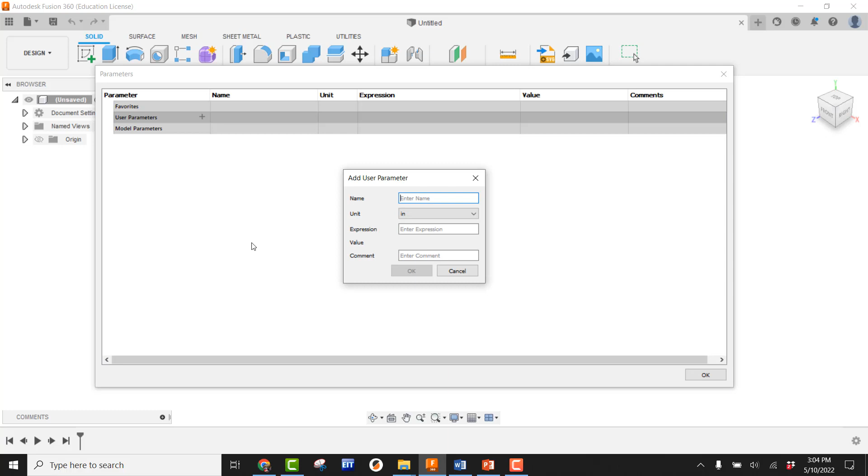All right, so what we have to do first is set up our parameters. What I'm going to be doing is coming here to modify, going down to change parameters, and you're going to see we have 3 different things here. The one thing we're going to be focusing on are the parameters that we are going to be setting up, those are called user parameters. So when I hit the plus sign, you can see how I can start creating these parameters.

So the first thing I'm going to do is type in width. We're going to set up the overall width of this box assembly, and the overall width is 5 inches. So I'm going to type in 5 for my expression, and then a little comment down here, we're just going to say that this is the box width. I'm going to go ahead and say OK. Once we do that, we can now see that all those have been placed in our parameters dialog box.

Let's keep going. Okay, so we have our width, let's go ahead and do our height as well. When we measured our height, we found out that for the assembly it was 4.5, so I could easily type in 4.5. But the thing is, in the end, I want a box that's going to be able to correct and fix itself. So what we can do is, after we have this thing assembled, it's going to have some AI, some artificial intelligence to it with these parameters.

It's going to be able to shrink and expand and move around and thicken and all sorts of stuff. I want to keep this having some proportions to it, so I don't want to put in an exact number here. Instead, what I'm going to do is think about percentages. We measured this in real life, and the height of this box is actually 4.5 inches. So if I bring up my calculator here, if we took 4.5 and divide that by 5, which is our width, we can see that the proportion of it is about 90%, or 0.9. So I'm going to say, hey, I'm going to take my width, and I'm always going to multiply this by 0.9.

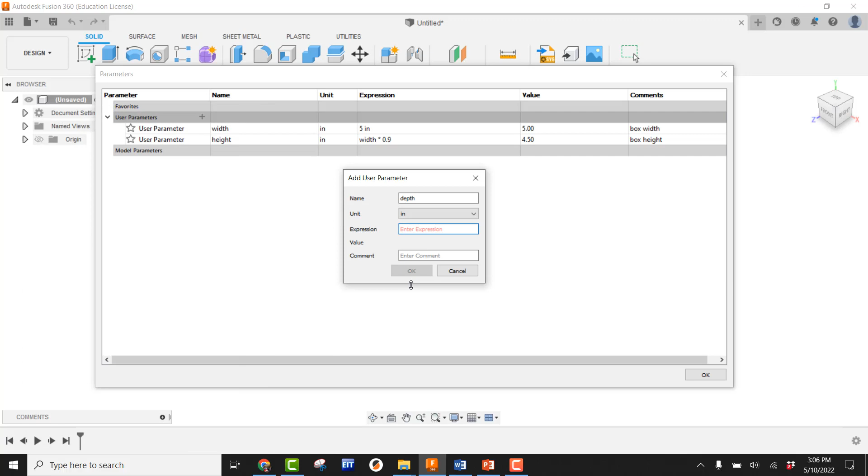In real life, our depth is 4 inches. So if we bring out the calculator, we took 4 divided by 5, which is our current width, we can see that right now our depth is about 80% of what our width is. So I'm going to say, hey, take our width and multiply that by 0.8, and then my comment on that is going to be, this is my box depth. So I'm going to go ahead and type that in.

All right, so width, height, depth, we got those all taken care of. We're going to add a new user parameter on this one, and we're just going to call this one THK.

This is going to be the thickness of our MDF, which makes up our panels for our box. Okay, the expression on this, we want to lock that down. I want to bring that at 0.25, which is what it is in real life, and I'm just going to say that this is going to be my box panel thickness.

Okay, so that is not referencing anything. I want direct contact with that so I can change that up.

So when we create our automata, we're going to have an axle that goes through the center of this, and that axle is going to be spinning, and that's what's going to be spinning our cams, which is going to be moving our followers, which are connected to our follower rods.

So the axle that I use in my class is a round dowel, and it has a diameter of 0.25. So what I'm going to do is add a new parameter, and I'm going to call this axle hole DIA. So that's our axle hole diameter.

The expression on this, we're going to lock that in at 1/4 right now, 0.25, and then we're just going to put in our comment, which is axle hole diameter. Okay, so I'm going to go ahead and say OK on that.

Now, the follower rods that we use in our class are 1/4 inch square dowels. So if you know anything about this, obviously we've got a square follower rod that's going to have to go down through a hole, which is going to be the top panel of our automata box.

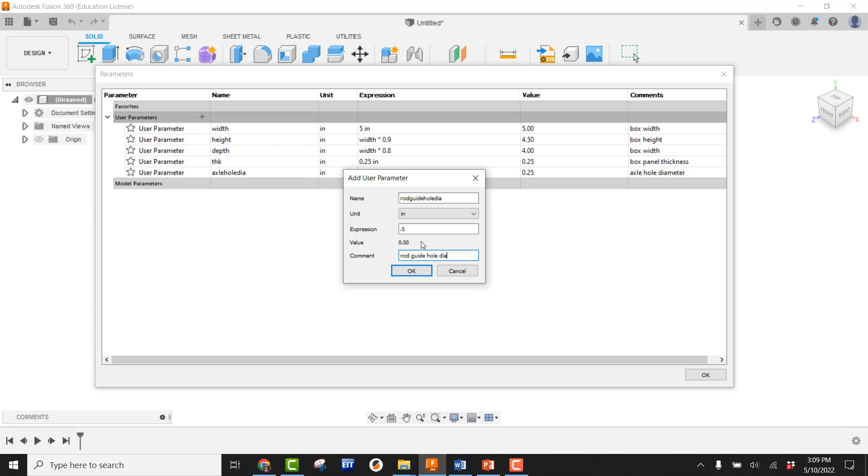And now we're going to say that this is rod guide hole diameter. Okay, so that is done. All right, so we have 6 different parameters that we've already set up. So I'm going to go ahead and say okay.

All right, so now that we have that done, this is probably a good time to go out here and do a save and just call this like your first, last, initial automata project. Because remember, this is top down. Everything's going to be right in this one design. It's going to be kind of cool. All right, let's get going.

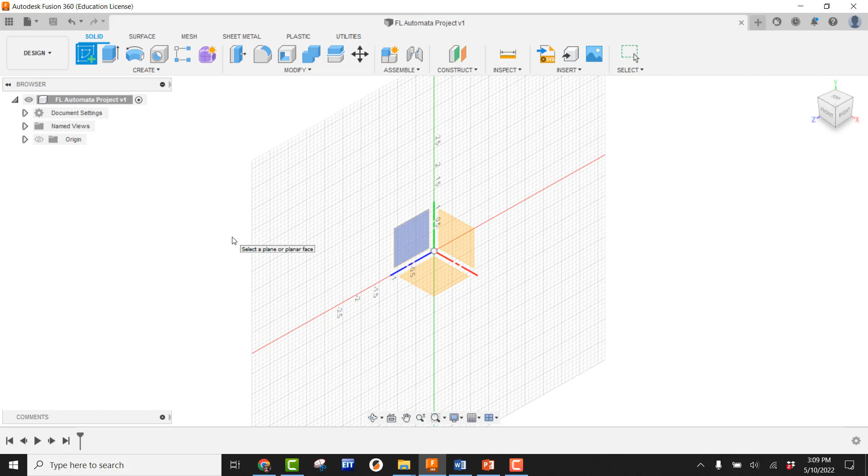So let's go ahead and create a sketch. Even though I'm using the top-down approach to Fusion, I'm going to actually be building this physically from the ground up. So we're going to be starting with our bottom piece, starting here with our work plane that's on the bottom.

I'm going to use my rectangle, start it here at the origin, just create my rectangle. I don't care the size.

And now this is when I can start adding dimensions. I'm going to go ahead and put in my dimension for my width. And since I've already set that up in my parameters, all I have to do is type in width. Okay, so I can see that my width is 5 inches. And if we go back into parameters, we can see that my width is 5 inches. That's why it's showing up there. And we can see that fx, which is a function.

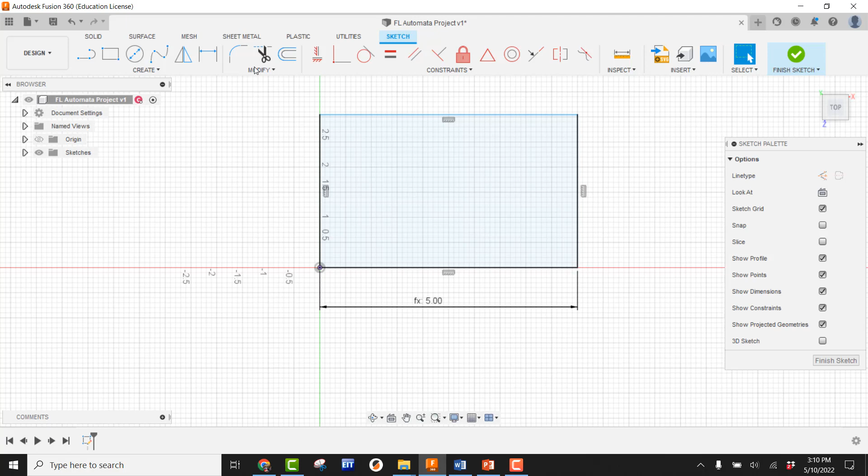Okay, so let's go ahead and now let's add a new dimension. So we're thinking about this, we are looking at the top of this. So this would not be the height, this would be the depth. So I'm going to type in depth. Okay, we can see that is 4 inches.

Okay, now we can go ahead and finish that sketch and look at this in the home view. All right, so now I'm going to extrude this up.

Now when I go to extrude this, we have to remember we have a parameter for thickness. This is the thickness of our MDF, our medium density fiberboard. Okay, so before I accept the extrusion, this is the most important thing to remember when you're doing top-down modeling. We are not creating a new body, we are creating a new component. You have to pick new component before you get out of this extrusion.

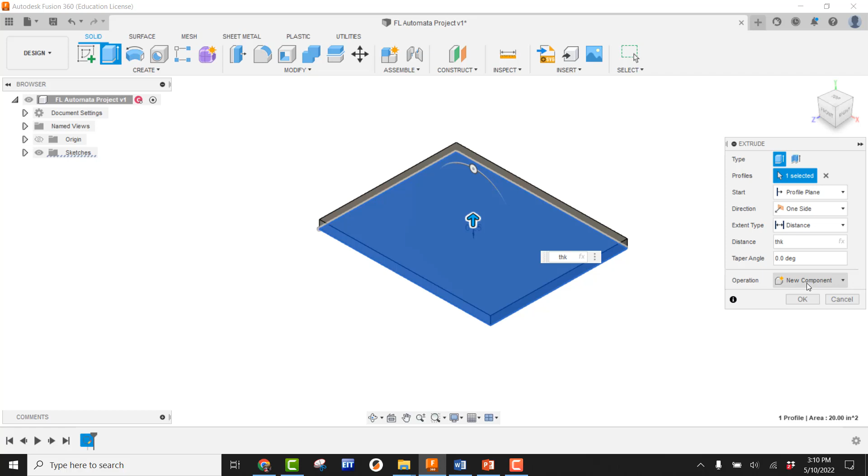So go ahead and say okay on that. All right, so the one thing we have to remember is that with this new component, we have to remember it's not grounded, okay?

So the first thing we're going to do is come over here to that new component we have created. We're going to come up here and ground it. Now if I try moving it, it's not going anywhere. The other thing is it's given us kind of a bad name. I mean, it's just called component 1. That's very generic and general, it doesn't do a whole lot for us.

So what I'm going to do is a slow double pick on top of this, and I'm going to give it an actual name. So I'm going to call this box bottom. All right, so our box bottom is there. It is grounded, and we can see it's gross and ugly. It's gray. This is not what it looks like in real life, because in real life, this is made of MDF, medium density fiberboard. So that's what we're going to apply as a material.

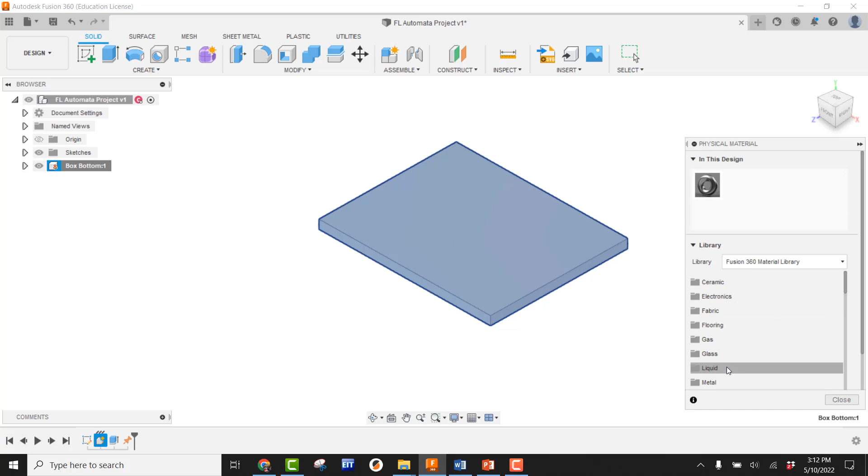So I'm going to go to box bottom. Sorry about that. So what we're going to do is apply a material, which is MDF. So let's right click on it, and let's go up here to physical material. And if we cruise down here through our different materials, we're going to see that wood has a folder. If we come down a little bit more, we can see that MDF is one of the choices. So I'm going to go ahead and drag that on top.

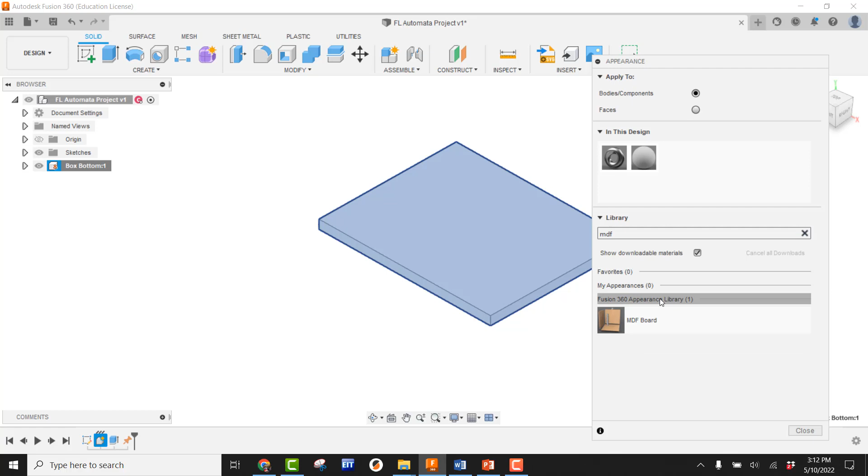The issue is, believe it or not, MDF does not have an image loaded, which boggles my mind, because if we look at appearances now, let's right click on box bottom and come up here to appearances. If we do a search in our library for MDF, we can see that there is one here with the Fusion 360 appearance library. Drag and drop it on top, and that does look like MDF. So unfortunately on these, you have to apply the MDF material separately and then apply the appearance. But it does look like MDF, so I'm happy.

All right, so we have our box bottom done. So now what we're going to do is start building up from there. We're going to start building our sides next.

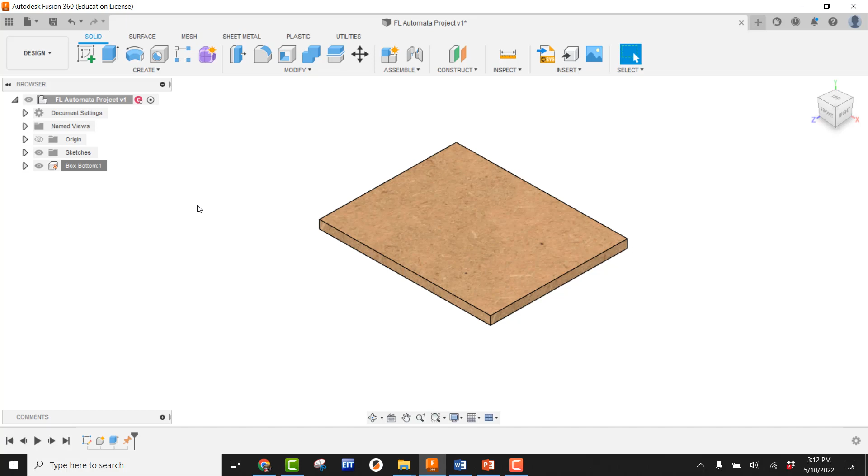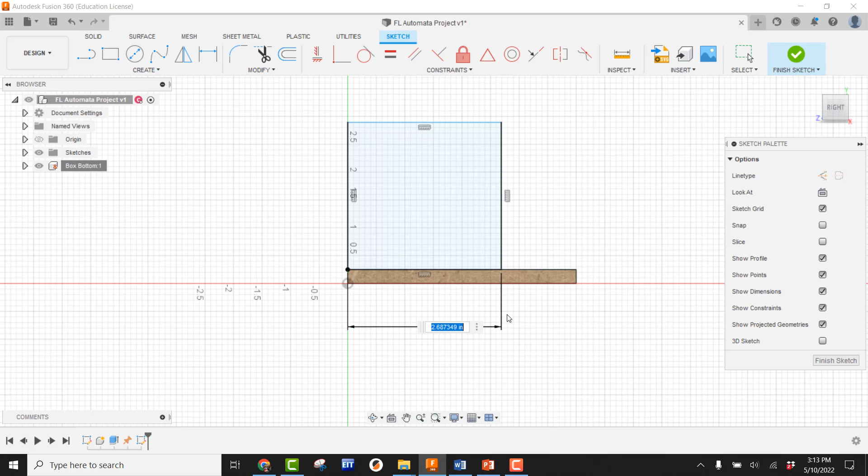Okay, so I'm going to go ahead and create a sketch, and I'm just going to pick on this face right here. I'm going to create a rectangle, starting it from the top left-hand corner of this current panel. I'm going to go ahead and just draw the rectangle out. I can now start applying my dimensions. So the easy one to remember is, if we're looking at the right side of this, this would just simply be our depth. Okay, and it's going to go back to where it belongs.

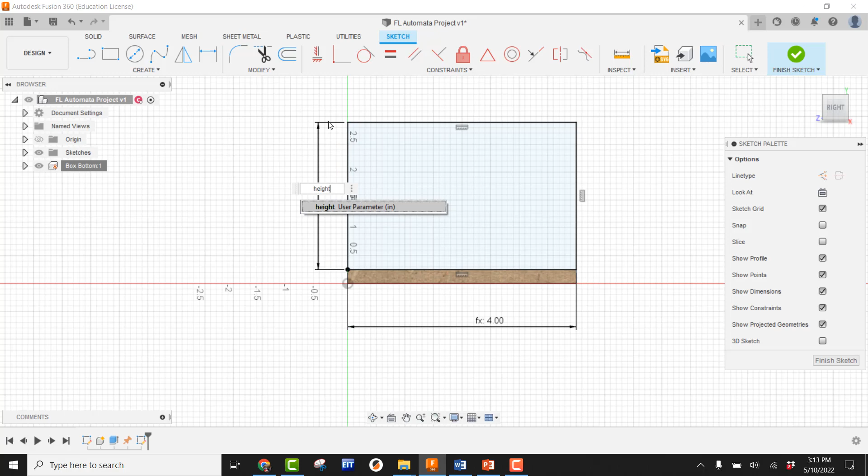Now a lot of people would look at this and automatically go out there and say, well, I just want the height, and apply the height to our dimension. Well, the thing is, we have our side piece and it is sandwiched between the top and the bottom. The top and bottom pieces have a thickness of 0.25, so it's not really going to be just height. So we can go ahead and make this happen by putting in a dimension, and we're going to say whatever the height is, go ahead and subtract the THK, which is the thickness of the material, and another THK. And we hit enter on that, and we can see that is 4 inches tall.

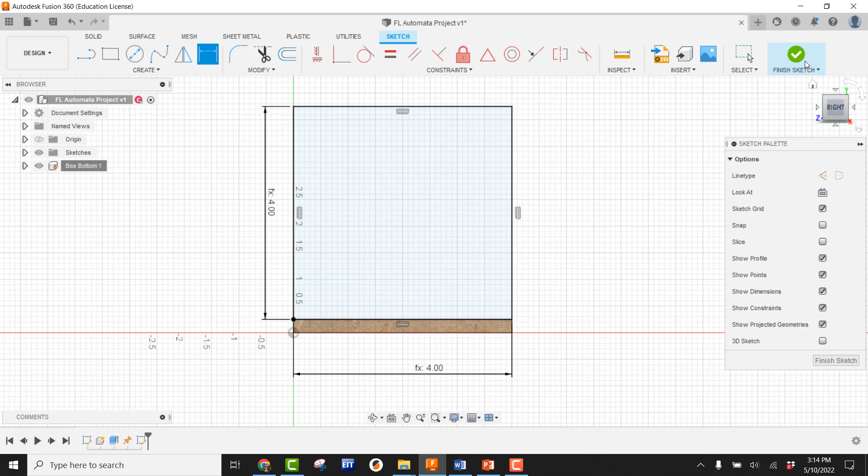Okay, so we know that the thickness of our bottom is 0.25. The thickness of our top, when it gets there, is going to be 0.25. So this would be a total overall height of 4.5, so we are correct. I'm going to go ahead and finish the sketch. Look at this in the home view.

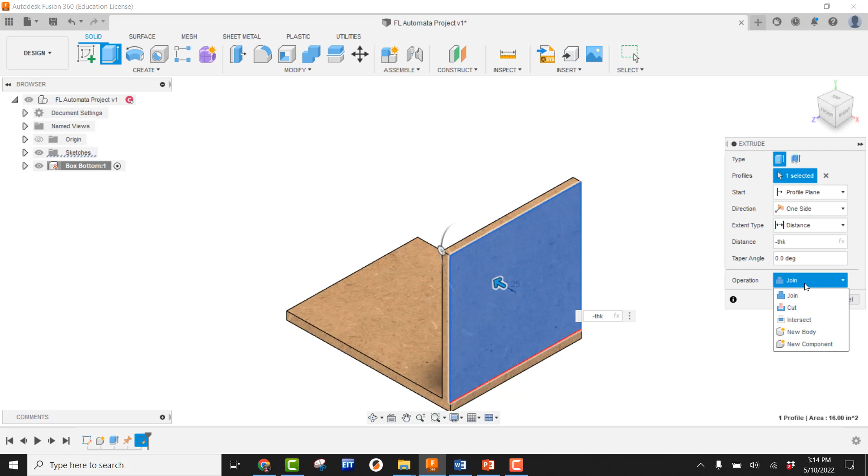Go into extrusion, pick the profile, and I'm going to send it this way. So you can see when I'm sending it that way, it's a negative number. So we have to remember to put in negative first, and now we're going to say this is THK. All right, we're also seeing that this is joining to the bottom. So don't forget, always in your operation, you have to switch this to new component, and we're going to say OK. All right, so this looks great.

All right, it looks exactly where it's supposed to be, but the issue is we built this in place. It has not been joined, has not been applied a joint to it.

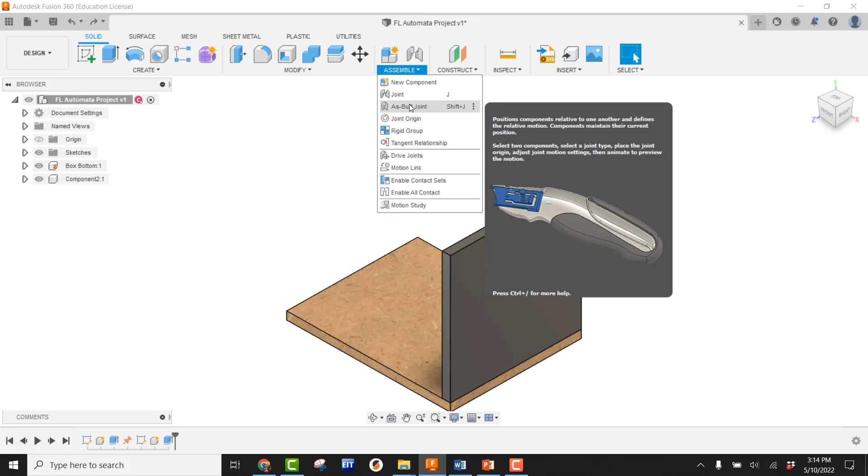Okay, I'm going to undo that and show you an easy way to put that in place. Come up here, go to Assemble, go to As Built Joint, and we're just going to say, keep that right where it's at, and reference this piece here. We can hit play.

We can see that rigid joint has been attached, so say okay. We're not having to worry about joint origins, just saying keep it right there, and apply a rigid joint. Kind of cool, right? This is giving us another bad name, just Component 2, not very descriptive, so let's type in Box Side and rename it.

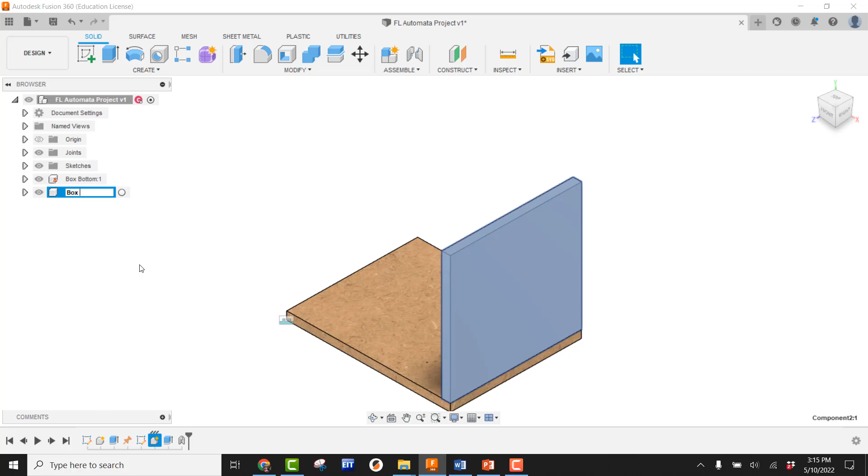We need to right click on this and add some physical material to it. We still have the MDF from last time, so we can drag that over. Come to my box side, go to appearance, find my MDF, and drag that on. Okay, so we have our side developed.

Our side isn't just finished as shown. Remember, we have a hole that has to go through it for our axle, so we have to drill a hole.

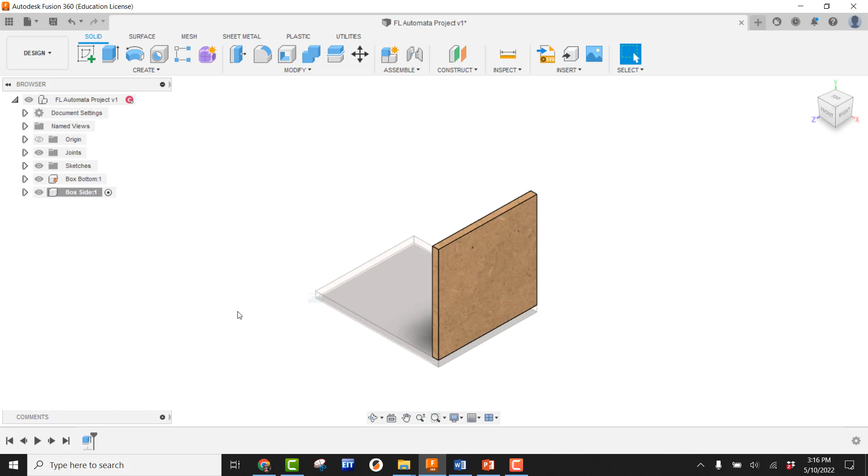So I'm going to come down to my box side, and it's just something I like to do: if I'm working on a particular piece, I make that component active. Come in here, and you'll see a little radio button next to my box side. If I pick that, everything goes transparent, and the only thing I'm talking to right now is just that part.

Now I'm going to place a hole on this face. There are some references we have to know here, and you'll have to look at the sketches we made in class, the multi-view, for this information. Basically, this hole needs to be back halfway. This total distance, going from front to back, that's its depth, so I'm going to say this hole is our depth divided by 2, to be dead center.

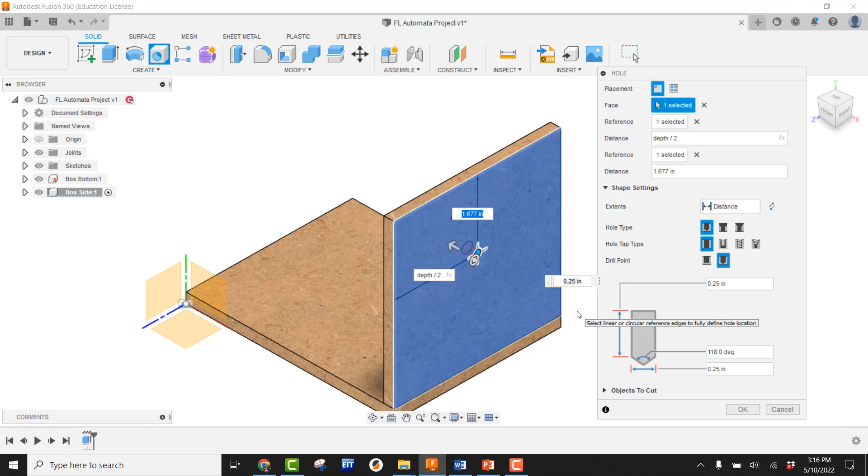Now I'm going to come up to the top and pick this top reference edge. I'm going to put this in parentheses: I want this to be the height, minus our thickness and another thickness, in parentheses, then divide that by 2. That should put it dead center in that face.

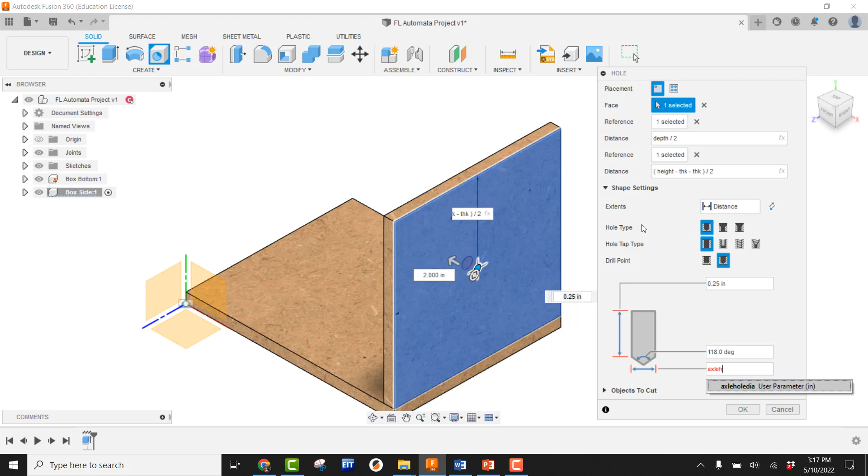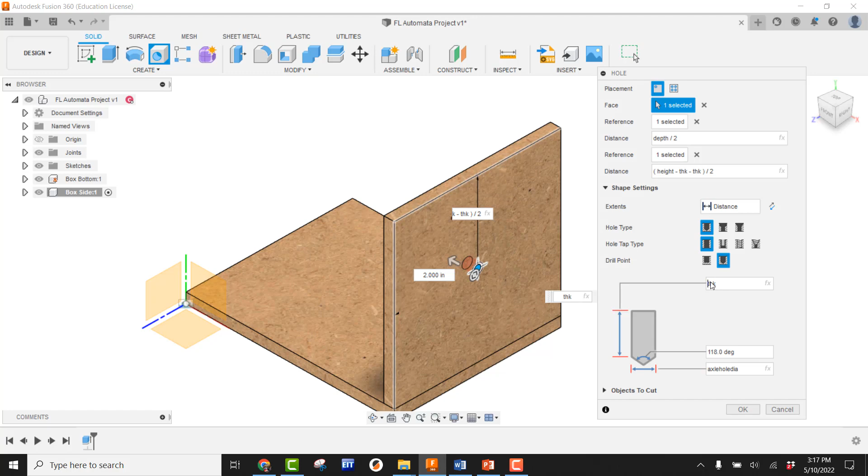My diameter is going to be my axle hole DIA. And the depth of the hole itself, we can just make it equal the thickness of the material, so I can type in my THK. So it's my depth divided by 2, taking my height, subtracting thickness and thickness again, then dividing that by 2. Our thickness is our hole depth, and our axle hole DIA is our diameter. We say okay on that.

There's my hole. I'm going to switch this back into assembly mode by hitting the radio button right here. Now let's look at this from the right side, and I can see that hole is dead center of that side panel. So we're doing great.

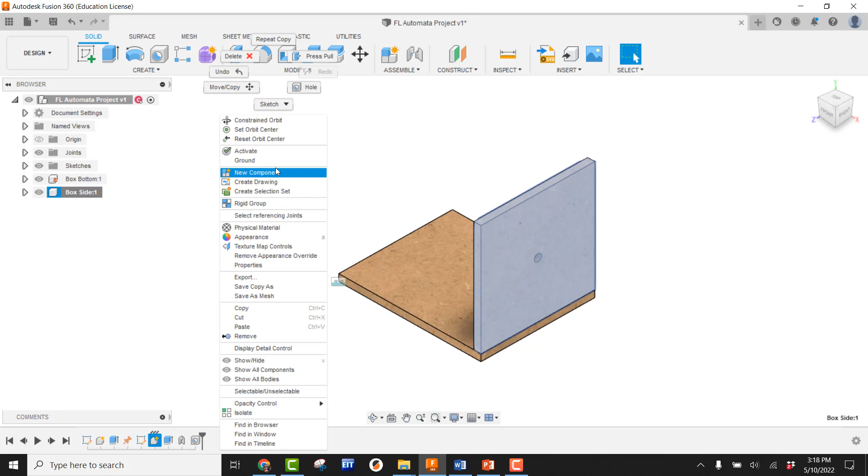Now that we have our side done, we have to create another side, we've got to keep building this up. So instead of going out and creating a whole new side, it's already done, we have the component. How about we just right click and do a copy on this, then right click out in white space and hit paste. Then we can push this with the triad and say okay.

At this point, you should know how to do this using our joints: coming in here, finding the correct joint origin. If you need to filter, you can hold control. We're going to place that right where it's supposed to go.

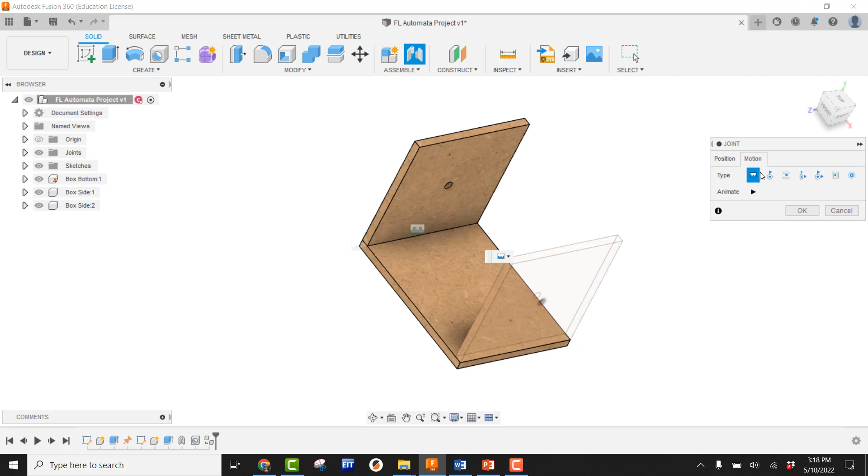Drop that right in. We can see that's a good rigid constraint. We can animate it if we want to. Let's go ahead and say okay.

So right now we're back into the home view. We can see we have our bottom and our two sides. Now we're going to go ahead and build the top.

I'm going to come up here, create a new sketch, and just be on this very top surface. I'm going to pick on it. Now what we're going to do is actually reference existing geometry.

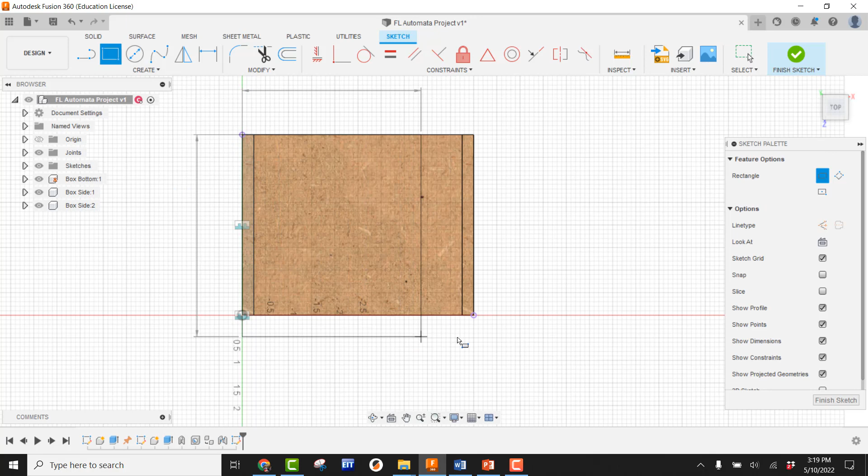In order to do that, I'm going to use create, go to project, and for this one I'm just going to come right here to this top left-hand corner. I can see at that point there, so I'm going to select it and then pick on this point as well. This is when I can go ahead and just use rectangle, start at the top left and take it to the bottom right point that I just established.

I'm going to finish that sketch. I'm going to use extrude, and now I'm going to be picking this face and this face. Make sure you're selecting all the parts of that to make that profile.

Okay, I'm going to go ahead and drag this up. There's some weird things happening. Why? Because we have not switched this to new components. So go ahead and do that.

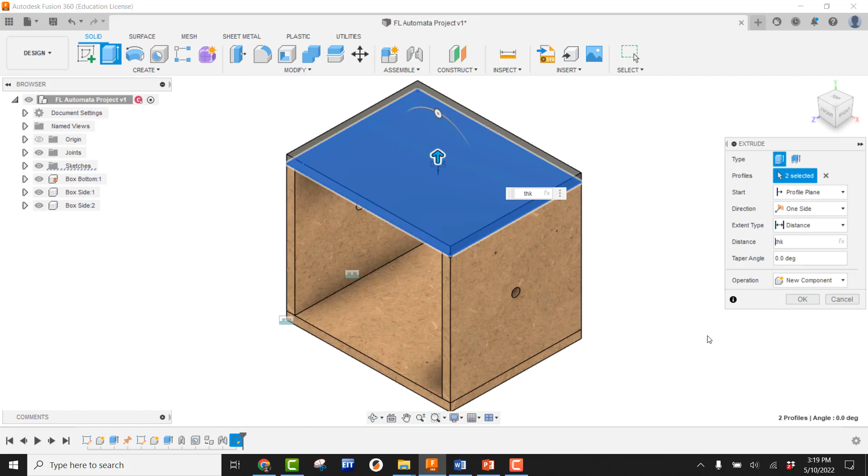Now it's going to be asking us what our distance is, and of course that's going to be THK, our material thickness for our MDF. Once again, it's new components. I'm going to say okay. And once again, remember that's still not attached.

So we do have to go out there, go into assemble, find our as-built joint, pick the top, pick a side. Hit the play button to see if that's actually rigid, and it is. We say okay. All right, we got to get that renamed.

So now let's go and rename that. That's obviously going to be our box top. And now our box top has to have physical material.

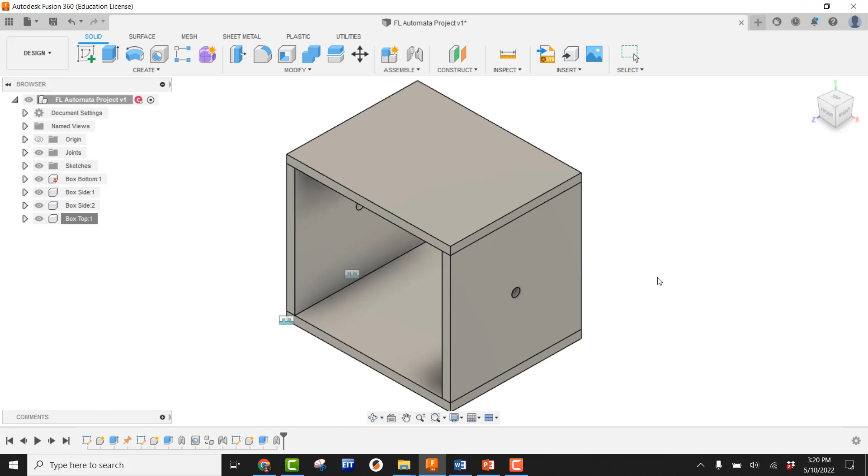In our case that's going to be MDF. We can drop that on. Okay, and then we have to do our appearance, which is also going to be MDF. Let's drop that on and hit close.

All right, so this is the point when I'm having my students look at our sketches, our multi-view from the day before. Obviously our top is just not going to be a plain piece. If it was, we could have just simply copied our bottom and brought it up, but in our case our top actually has holes drilled into the top. The holes are going to have the rod guides, and the follower rods are going to be sliding through the rod guides, so we have to place those holes into the top.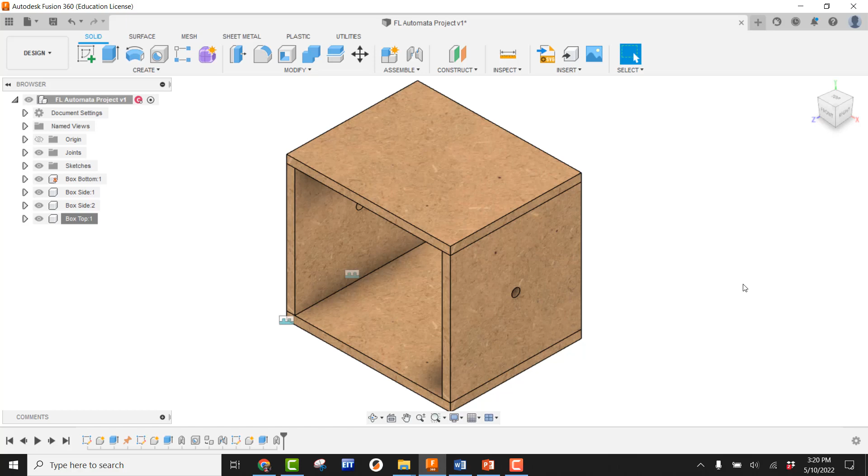So I'm going to come here right to my box top, hit the radio button just to make it active, and now we're going to get started. I'm going to go to my hole feature, come right here to the top, pick on that face, and now I'm going to come out here and start getting my reference geometry.

So I'm going to start with the easy one. Start here at the front. It's going to go half that distance back, so that's my depth, and I'm just going to divide it by 2.

So now I'm going to go ahead and switch to this reference edge. In my student sketches, we said that the X dimension on this hole, how far it's going to be from the edge, was 1.25.

I'm not going to apply just 1.25 in this case because I want this to be proportional in case we do actually scale this up. So instead of the width being 5, let's say we increase it to 10. I don't want that follow rod to be all the way over, or the rod guide to be all the way over against the edge at 1.25. If we have all that room, we're going to keep it proportional.

So once again, I'm going to do the scaling thing. I'm going to come here to the calculator and say, all right, this is 1.25, this is what I want it to be. But I'm going to go ahead and divide that by 5, which is what it is, the existing. We can see that that's 25%.

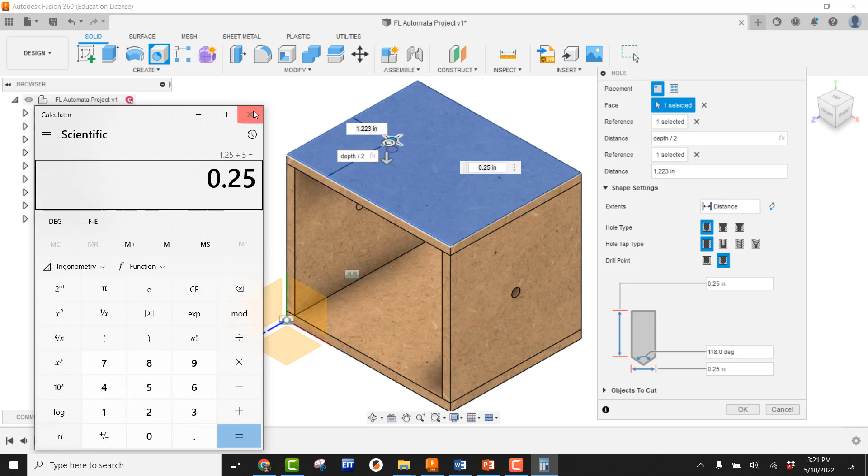So what I'm going to do is say, hey, I want this to be worth my width multiplied by 0.25, which is 25%. Okay, my hole diameter in this case is not going to be my axle hole diameter.

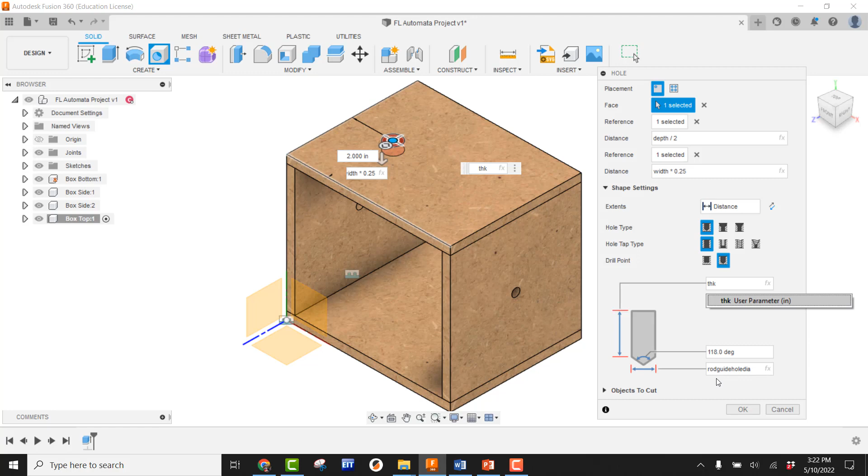This is going to be my rod guide hole diameter, and my depth on this is simply the thickness of my material. So we've got our depth divided by 2, our width times 0.25, our rod guide hole diameter, and our thickness for our depth. Let's go ahead and accept that.

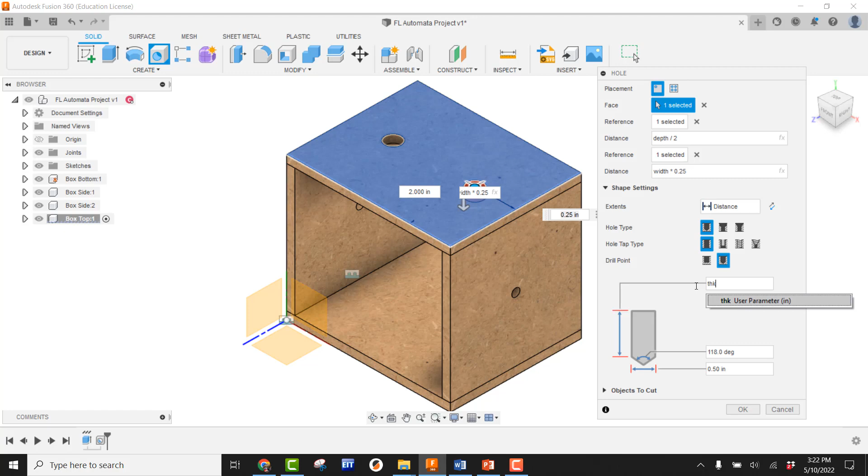Now we're going to do the same exact thing again. Our hole comes in. Our first reference is going to be depth divided by 2, and from this edge, my width multiplied by 0.25. My depth itself is going to be the thickness of our material, which is our MDF, and this is going to be our rod guide hole diameter. We'll go ahead and say okay on that, and that hole is now in.

Now I'm going to switch back over into my assembly environment. We're looking pretty good here. Go ahead and switch to the home view, and make sure you understand where your actual front is. This can get a little bit confusing if you think about it.

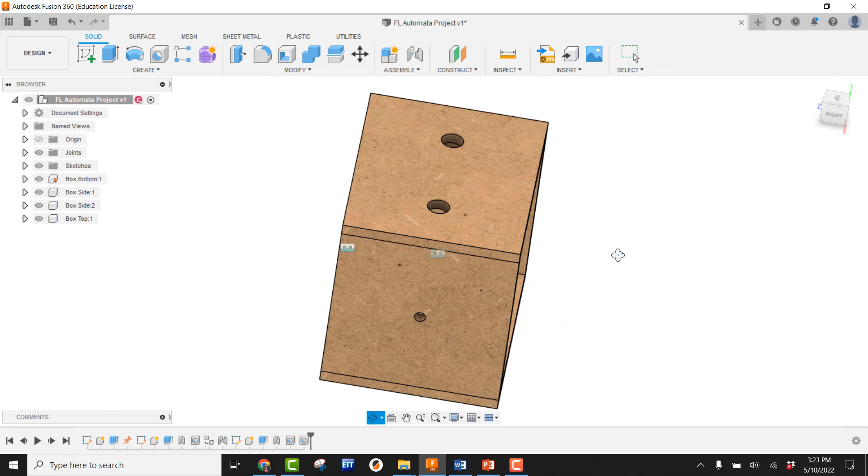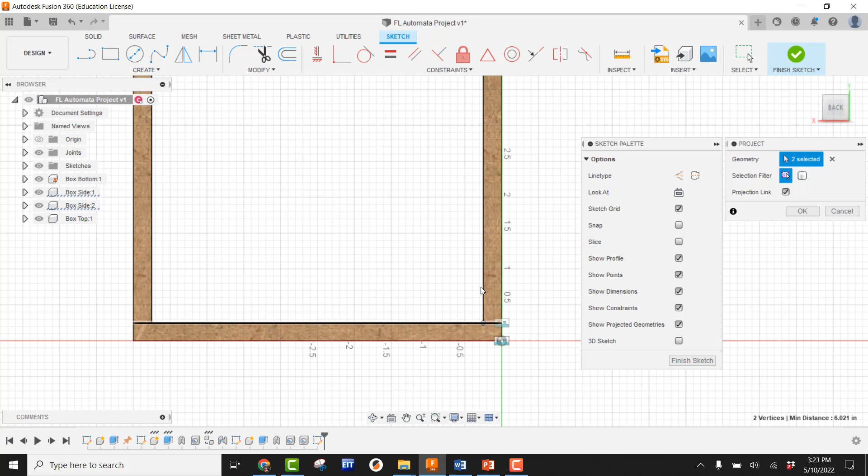So just go to home first and then slightly flip this over, and now let's create a sketch on this back face here because we need to build that back part. I'm going to go into create, go into project again, and sneak right in here and look for that exact point at that corner, and then this point right here at this corner. So we have those two reference points with our existing geometry.

Just like our top, we're going to create a rectangle that goes from the top left to the bottom right, just like so. We'll finish the sketch, go into home view, and now let's extrude that. I'm going to extrude this profile only, shoot this in, but notice it's indicating that's a negative, so we're going to say this is a negative thickness for our MDF.

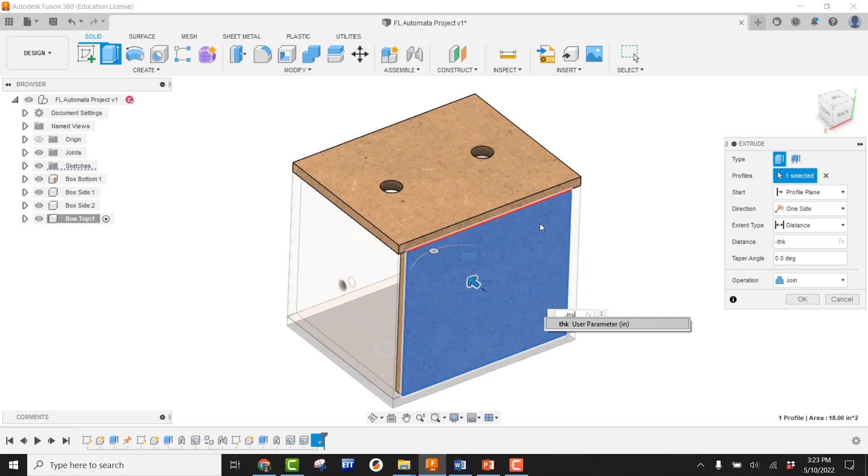Now let's switch this over to a new component. Don't forget the new component. Let's say okay on that. Let's go into assemble, go into an as-built joint, pick that back piece, and it does not matter which one you pick from here on out. We're going to go ahead and get that rigid joint, and we'll say okay.

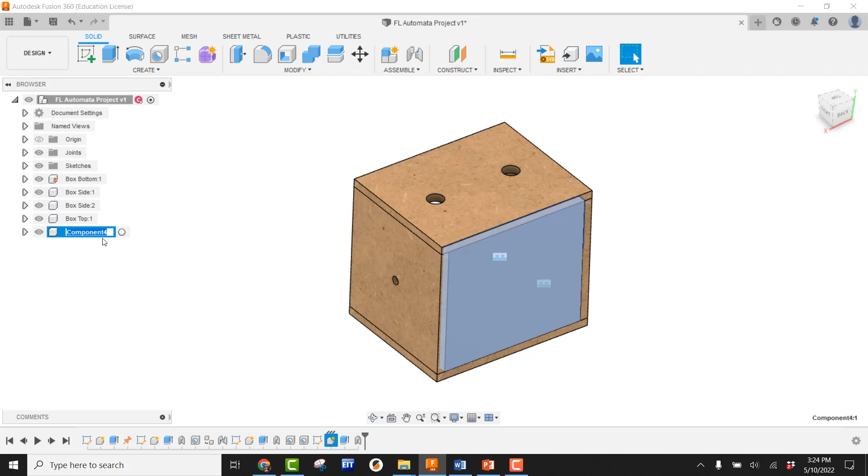Obviously, this now needs to change. This is going to be my box back. Now we need to come in and go into our physical material to apply our MDF to this, and we need to go to appearance and put our MDF on that back as well.

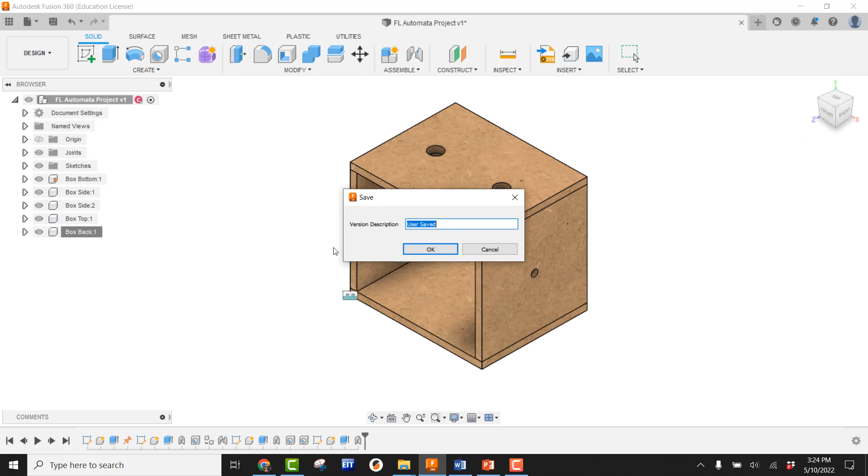At this point, this is a good point, we should probably get this saved up. I'm going to slide this right over here to the right, and now I'm going to be pulling open my change parameters. I'll go ahead and condense this down just a little bit where you can kind of see this happening on the fly.

If we've done this correctly, it's going to have a good relationship between all these parameters, and we're going to see the real importance of why we use parameters. So our width right now, let's say we don't like that width of 5 inches, we want to double it to 10 inches. We hit 10 and hit enter, and we can see this thing has now grown double on its width. Since we have percentages for our height and our depth, we're going to see that those are also proportional.

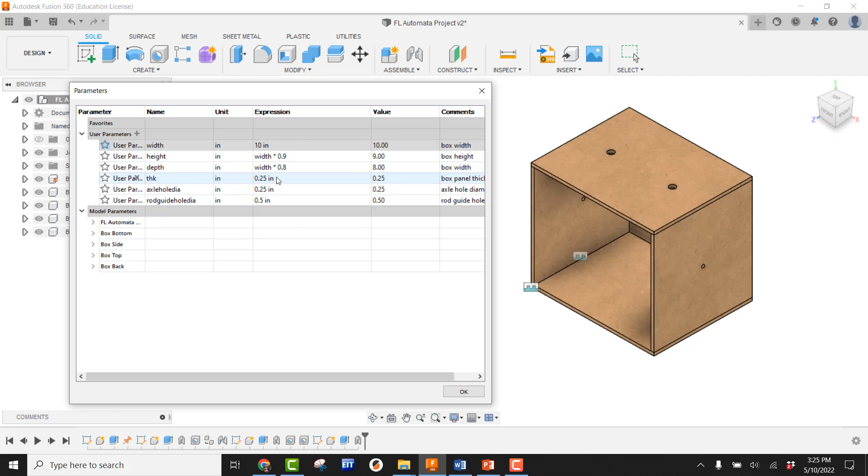Hey, maybe the thickness isn't thick enough, maybe we need to increase that. Let's go up to a full 1 inch for our thickness on our material. We can see the MDF has now switched up on that. Maybe our axle hole diameter, maybe we've increased that to a half inch. We can see that changes on the fly, and we can also see that our rod guide hole diameter maybe isn't big enough, so maybe we need to increase those to 1.

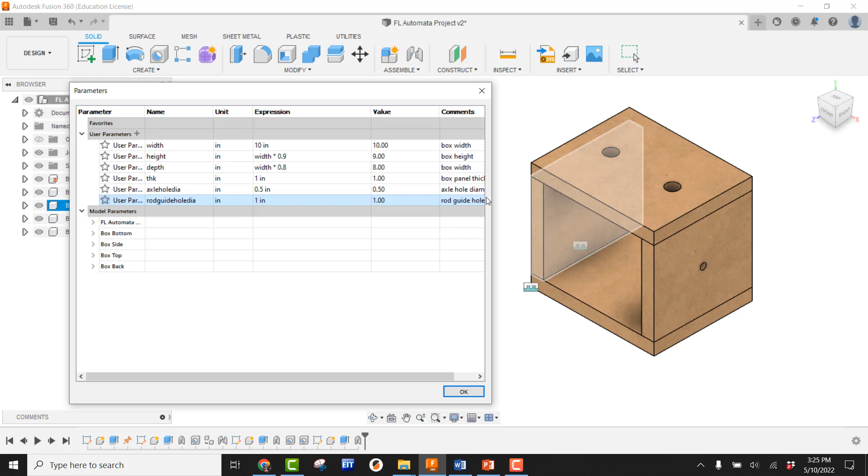It's actually pretty amazing. So I'm going to switch all these back to where they were. Our width was 5, our thickness was at 1/4. Our axle hole diameter was at 1/4, and then our rod guide hole diameter was at 1/2 inch. Okay, so we're all set there.

So what you're going to be doing now is start creating some other parts that we're going to use within our automata. Those parts are going to be the rod guide, the crank handle, the follower, and then the shaft collar. But you're going to be doing this using a top-down approach. So what that means for us is that we are going to have to go out and look at the working drawings we have within Google Classroom.

When we go into Google Classroom, underneath classwork, underneath automata, you're going to start seeing all those different working drawings. So shaft collar, that's a pretty simple one. Let's just take a look at that.

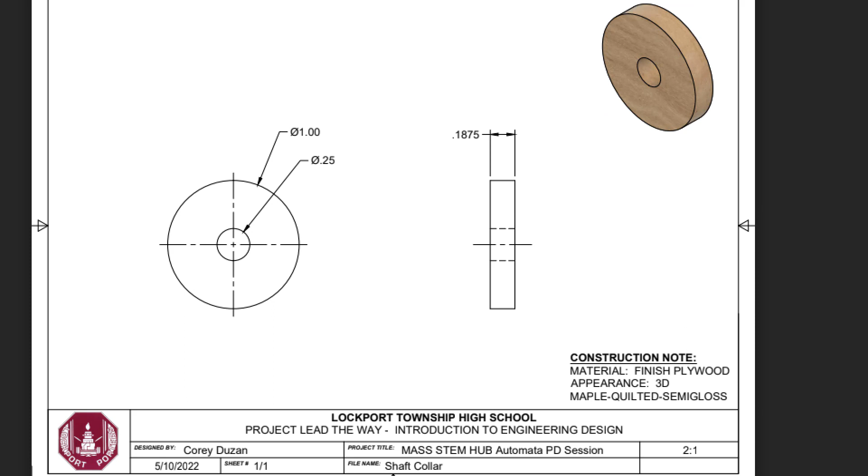So a couple things just to note real quick. We have a construction note down here. The material that we're going to use for our shaft collars, and actually for our cams, for our crank handle, for all those, is going to be a finished plywood. And the plywood itself is going to be 0.1875, which is 3/16. Okay, because we're simply laser cutting those. We're giving those to you guys to actually create your prototypes. The appearance on this is going to be a 3D maple quilted semi-gloss. I'll show you where that's at here in just a little bit.

So really, if you think about it, since our shaft collar is going to be connected to our axle, we already know what that is. That's our axle hole DIA, that's that parameter. And since we're going to have parts made of plywood or laser cut from plywood, we can actually set up a new parameter because they're all going to use the same exact plywood, which is 3/16 or 0.1875. So we'll set up a new parameter for that. Really, the only thing we don't know is the diameter of this actual shaft collar. That's 1 inch. That's pretty easy.

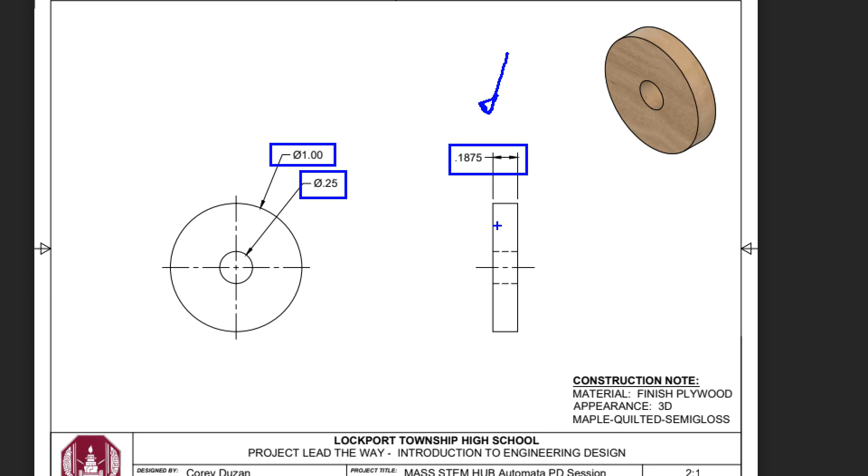Okay, so let me show you how this works. If we go into Fusion, the first thing we're going to do is go back into Modify, go into Change Our Parameters, and let's go ahead and come up with a new user parameter, because everything that we're laser cutting is going to be out of the same plywood. So I'm going to keep this simple. I'm going to say this is PLY THK, so this is our plywood thickness, and we're going to say this is worth 0.1875.

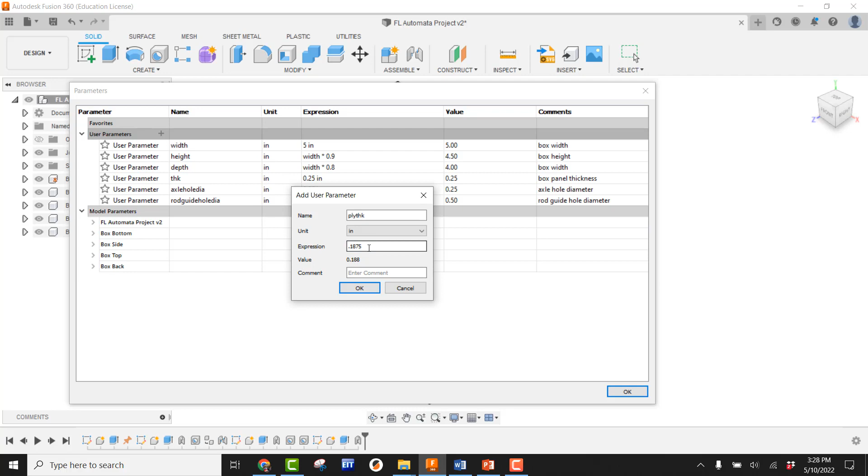Okay, we want to put that in as an actual number so we could actually change it if we need to. The comment on this one is going to be plywood thickness. And there you go, that's what your user parameter is going to be for your plywood thickness. Okay, we say okay to that. We're going to go ahead and say okay.

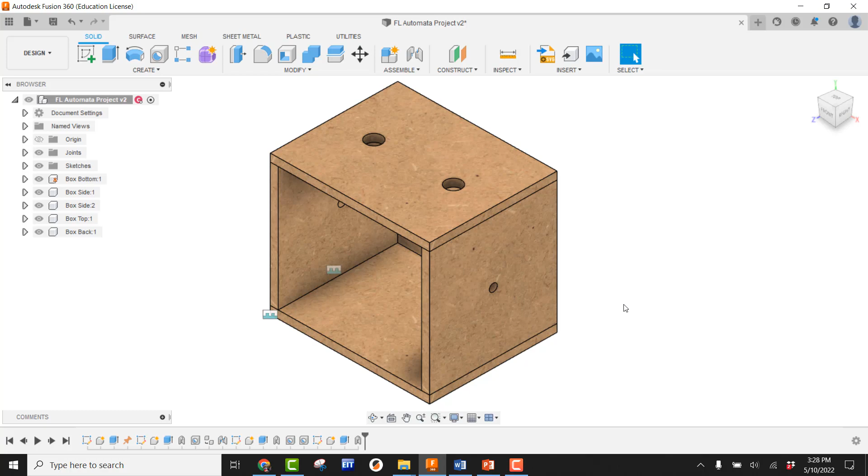Okay, so there's a couple ways we can do this. We're going to build a shaft collar first. So let's go ahead and create a sketch here. I'm going to just pick this face. We know what the diameter was, that was 1 inch, so I'm going to apply 1 inch diameter. And now I'm going to create a hole that's concentric, it's going to share the same center point. And I'm just going to type in, this is where my axle hole DIA. Okay, so that's in there. I'm going to go ahead and finish the sketch.

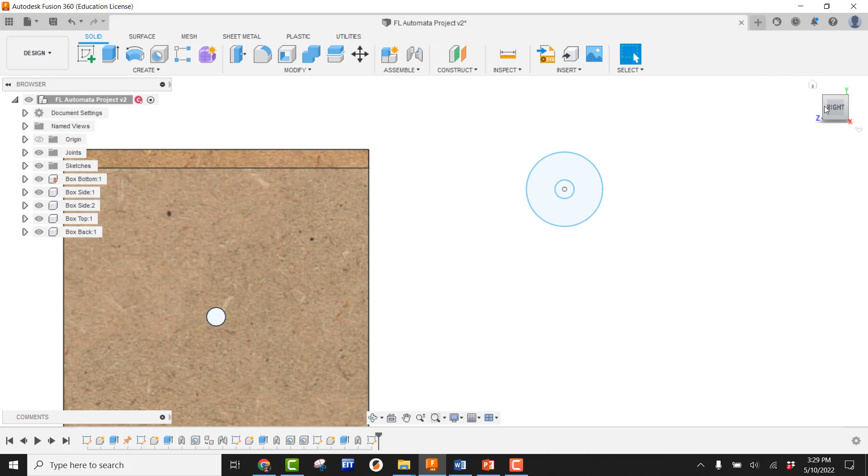Okay, look at this in an isometric view. And now I'm going to go ahead and extrude this. Our extrusion on this one is not going to be THK, it's going to be PLY THK because it's made of plywood. And don't forget to make this a new component.

We say okay. Now this is when we can come over here, we can give this a name like shaft collar. And we can go to shaft collar, we can go into our physical material. This is going to be finished plywood. So I'm going to come down here and find wood. Okay, and you're going to be able to see finished plywood.

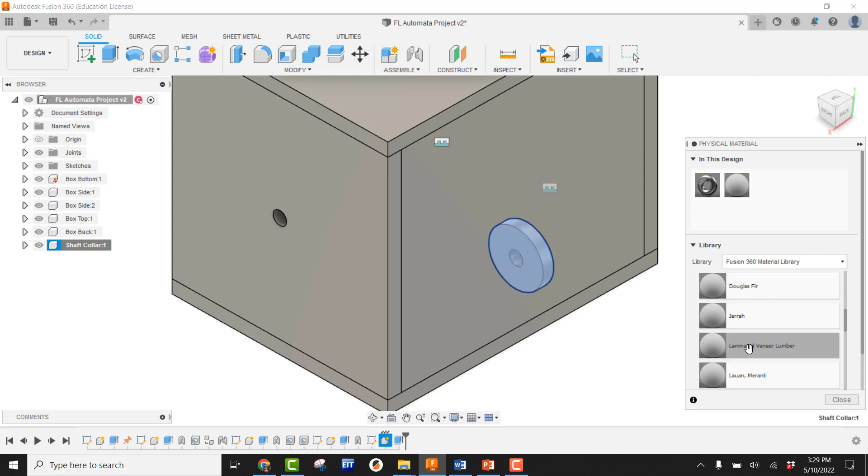There it is, I'm going to drag it on top. We have it, and now we can come out here and go into our appearance. We're going to look underneath our finished wood. I think it's right here—this is our 3D maple quilted semi-gloss. Drag that right on top. We have our appearance, and that looks good.

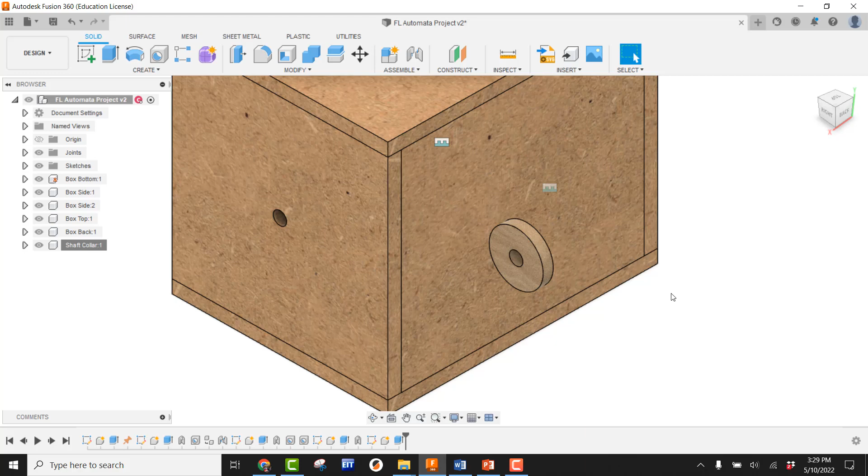Remember, we haven't done anything with it, so it's able to float. And the actual assembly itself, there's going to be two of them.

So at this point, if you want to, you could simply just go ahead and do a copy, do a paste, and just send that back. All right, so we got it. That's the first way we could do it.

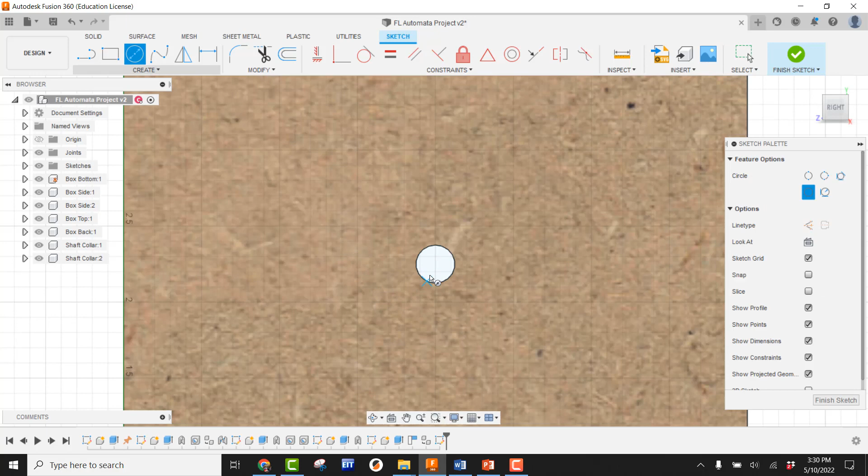The second way, it just cuts out one step. It's nothing really groundbreaking, but it's kind of cool to see. So check this out: we could create a sketch right here on this face. When I zoom in, I'm going to draw a circle, but I want it right at that center point, with a diameter of 1.

Instead of drawing the actual circle, I could use or reference geometry that already exists. So I'm going to say project, come in here and find the edge of that hole, say OK, and then simply finish the sketch.

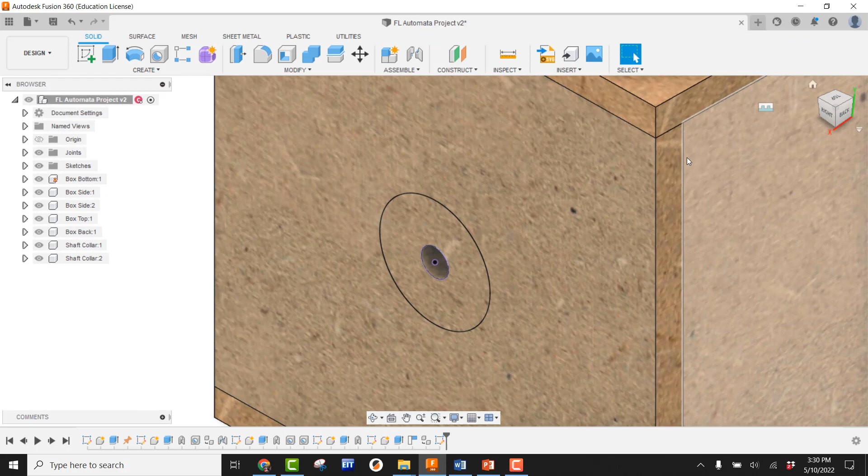Now I can do an extrude, pick on this profile. Remember, this is going to be PLY THK, and don't forget, this needs to be a new component. I'm going to say OK on that, pull this off, and then you know the rest.

We could go and change the name of this to shaft collar, do the material and the appearance, take care of it. All right, so that's another way to do it.

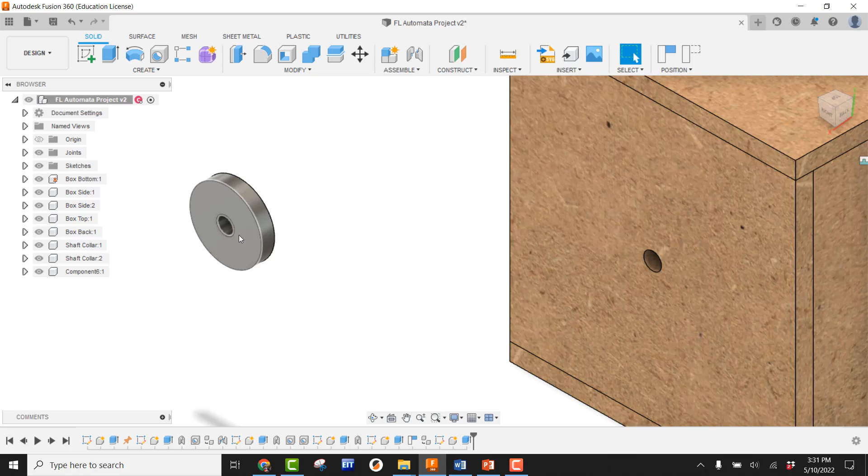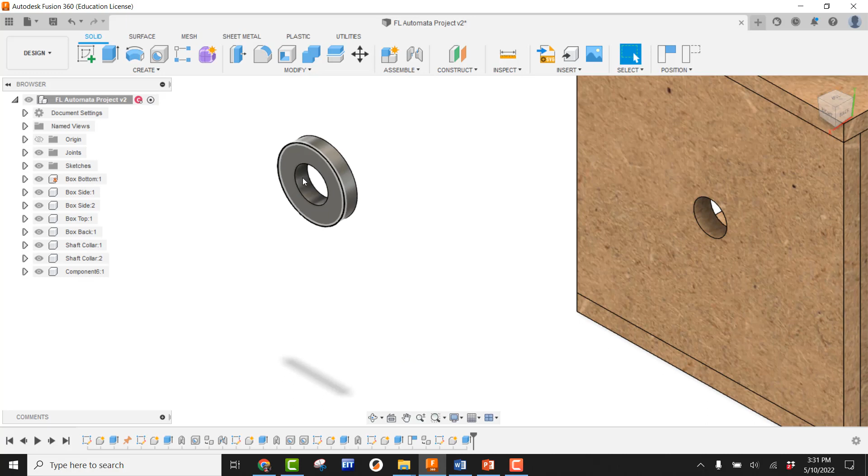Now, if you're looking at that, you might think, hey, you never actually put in the axle hole DIA parameter. Well, it's referencing this, which does. So if we come out here and do a change on this—go into change parameters, come into axle hole DIA, switch it to 0.5, and hit enter—we'll see it changed here, which is what we put in manually, and also here, which is what we reference. Pretty cool. It will update with it, if you're referencing that geometry.

So it's just something kind of cool to use, project with, and that can help you down the road. So what that means for your assignment is that you've got a shaft collar you have to create.

Using a top-down approach, follow a top-down approach. You're also going to be creating the crank handle, and you're also going to be creating a rod guide—I don't know if I've said that one or not. So you have to start thinking about your parametrics, your parameters that you're going to start loading in.

Your crank handle is going to have two holes in it: one's going to be on the axle, one's going to be hosting a crank handle peg. Guess what—it's going to be the same exact quarter inch rod that we're going to use for the axle as well as the crank handle peg. So what does that tell you about the parameters? Use axle hole DIA for both of those holes.

When you're creating the rod guide, it's going to go into the rod guide hole, which is on top of your box. You could reference the geometry and do it that way, or when you go to create your rod guide, you can simply use your rod guide hole DIA parameter. So you can use all that stuff so this will resize if you make any adjustments.

So there you go—that's the first part of creating our Automata project. That's showing the top-down approach: that's how you create the box, and that's how you're creating parts on the fly.

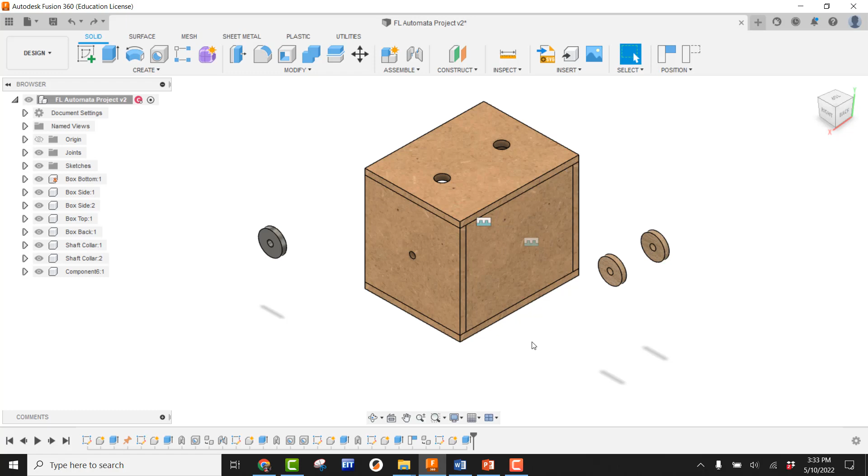How do you know if you're doing the top-down modeling approach correctly? Well, if you can see right here, since I've been creating this one, which is the one I'm currently in, you're going to see that there are no parts underneath it—that's bottom up approach. Top down means all these parts are embedded right here within this design.